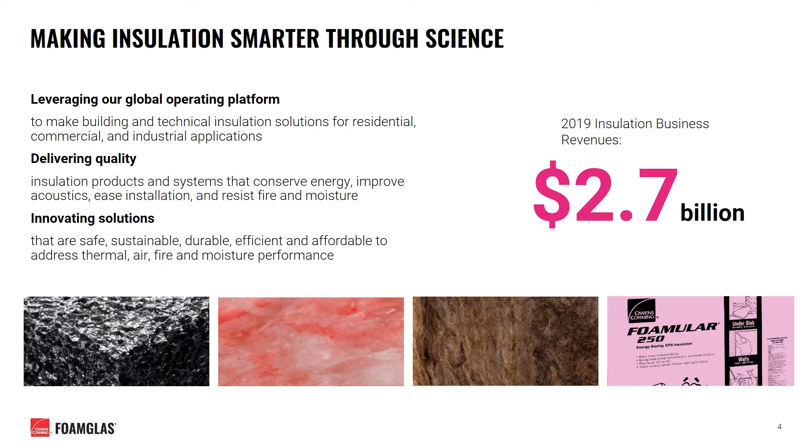Our product portfolio includes open and closed cell insulation solutions, including FOAMGLAS Cellular Glass, fiberglass, Paroc and Thermofiber mineral wool, and FOAMULAR extruded polystyrene. Being a global insulation business, we have over 7,400 employees across 20 different countries, and we also have 43 different manufacturing locations that allow us to service jobs across many different markets.

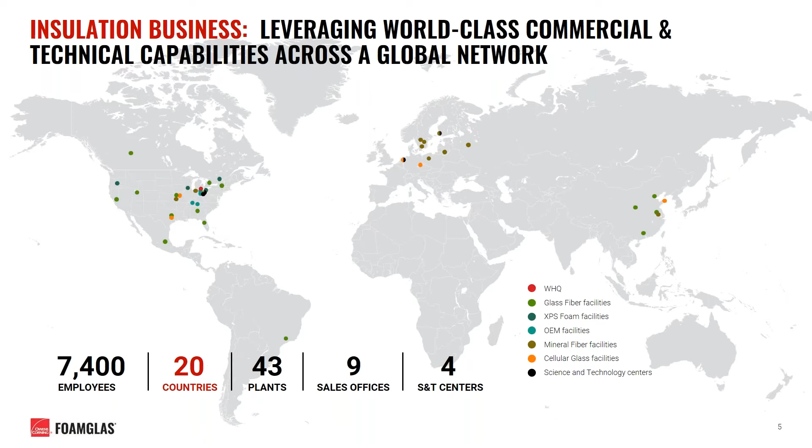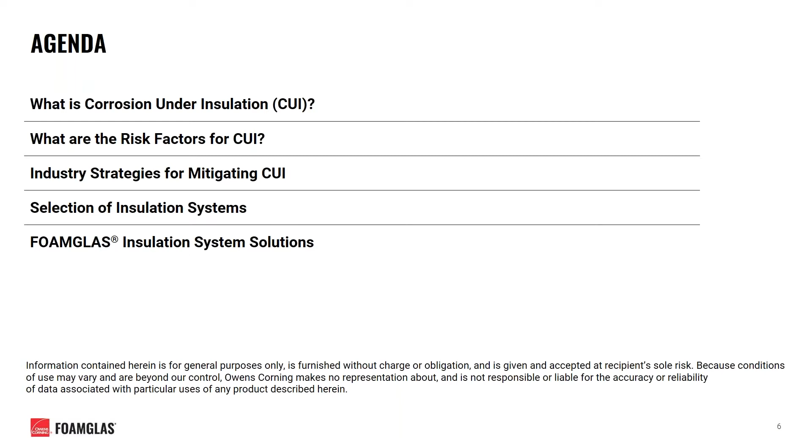I'd like to start with a question for the audience: what is corrosion under insulation? Let's dive into this topic. First, I'll define what corrosion is. NACE, the National Association of Corrosion Engineers, defines corrosion as a naturally occurring phenomenon commonly defined as the deterioration of a material, usually a metal, that results from a chemical or electrochemical reaction with its environment. I know it's a mouthful. Simply put, it's the degradation of a material into a more chemically stable version of itself given its environment.

In a 2016 report, NACE estimated the global cost of corrosion to amount to $2.5 trillion, which for comparison equated to roughly 3.4% of the global GDP at the time of the study. So you can get an idea of how large a problem corrosion is on a global basis.

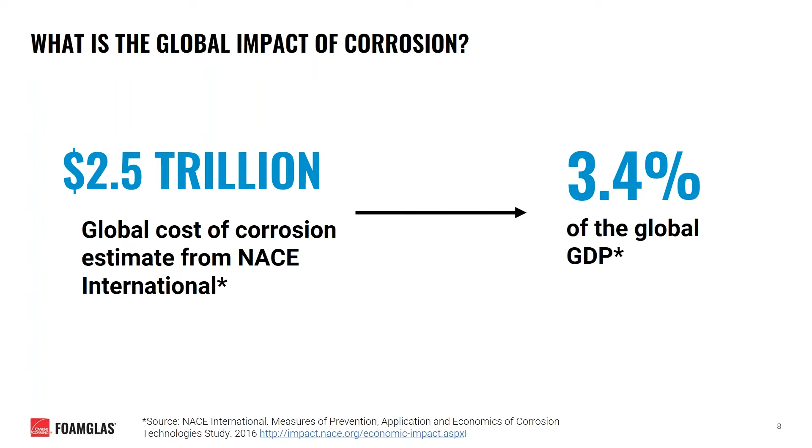NACE defines corrosion under insulation, or CUI, as a severe form of localized external corrosion that most commonly occurs on insulated carbon and low alloy steel and stainless steel equipment. Carbon steel and stainless steel corrode via different mechanisms, but in today's presentation we'll primarily focus on the corrosion of carbon steel pipes.

Here's a brief list of potential consequences of corrosion under insulation. It can lead to unanticipated failure of the process system, damage to expensive equipment, costly repairs and/or downtime. If it gets serious enough, or if it's on a significant process, it could be a safety hazard, leading to failures that result in fires or explosions, or worst case, injury or death—something to avoid and keep in mind when mitigating CUI.

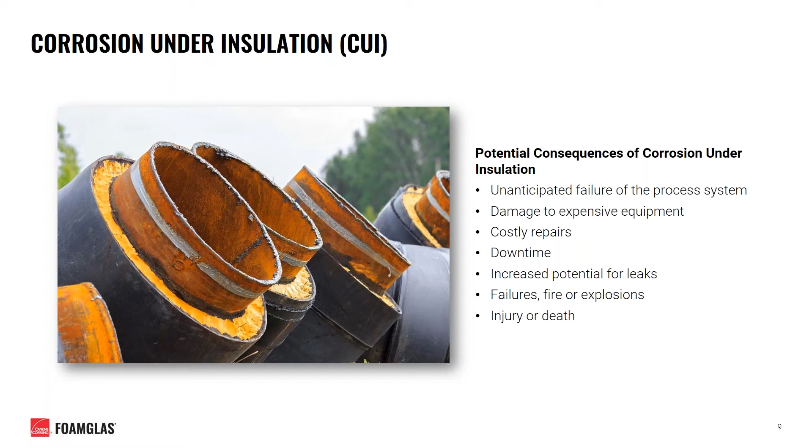There are three primary risk factors that contribute to the increased risk of corrosion under insulation: the presence of moisture, the chemical content within that moisture, and the presence of heat. We'll now try to understand the role each of these factors plays in corrosion.

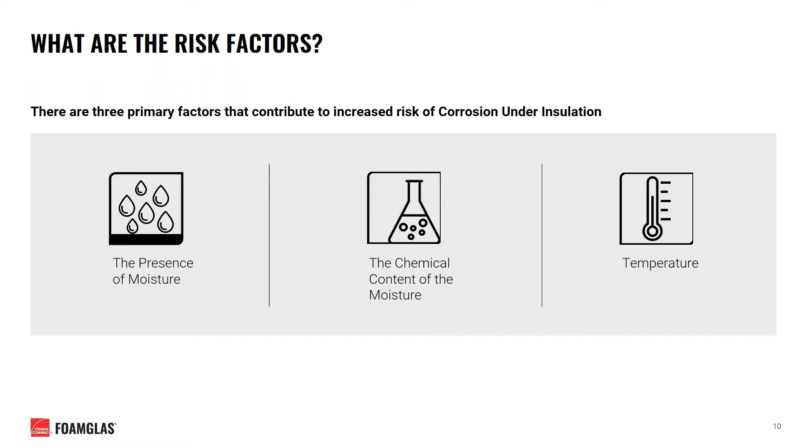Starting with moisture, the first factor we listed. It's often well understood that wet insulation can lead to various process and efficiency losses within a system, but the presence of liquid moisture or water is also a basic requirement for corrosion to occur. There are numerous potential sources for water to get into an insulation system, such as condensation, normal precipitation, process leaks, or even mechanical intrusion from sprinklers or cleaning processes.

I'd like to hit home on those last couple sources. Sometimes it's overlooked, but if you're working on a facility where part of the planned maintenance for a given system is the occasional hose-down of the equipment, keep that in mind, as it presents a big risk for water to penetrate the system at some point during the life of the process.

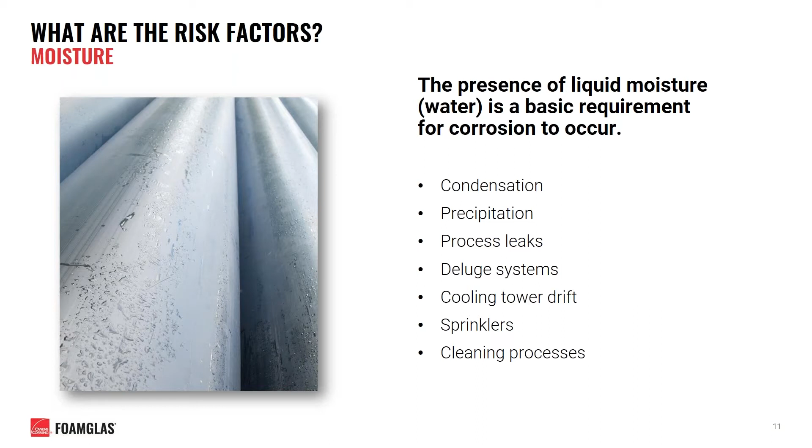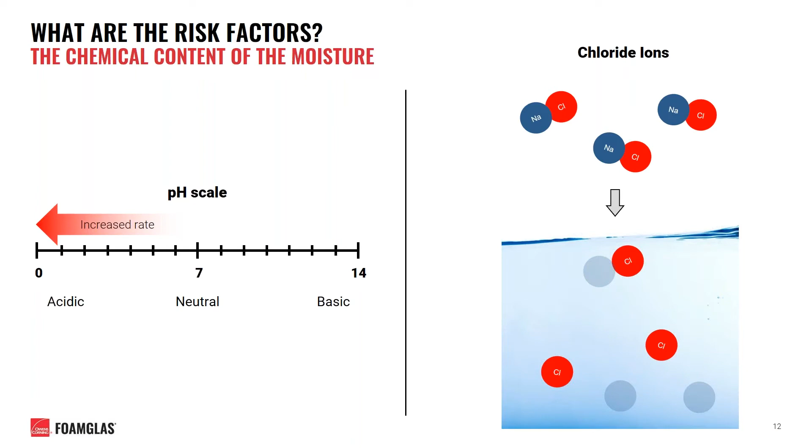Additionally, looking on the right, the presence of chloride ions or other contaminants that increase the electrical conductivity of water can also accelerate corrosion. Chloride ions can be introduced into a solution when molecules like sodium chloride, or salt, are allowed to dissolve in water. This can result from pollution from the external environment or by leaching from components of the insulation system that the water comes into contact with.

Another factor that contributes to accelerated corrosion is the presence of heat. As long as liquid moisture is available, the corrosion rate will increase with temperature. That means the primary surface temperatures at risk of corrosion are roughly 25 to 350 degrees Fahrenheit, where it's feasible for liquid water to penetrate a system and still contact the steel pipe. On the cold end, corrosion may still take place, though at a slower rate than at higher temperatures, whereas on the hot end, corrosion occurs much more rapidly.

However, as you approach temperatures above roughly 350 degrees Fahrenheit, it becomes less and less likely that liquid moisture will be in contact with the pipe, as it may boil off as vapor before coming to rest against it.

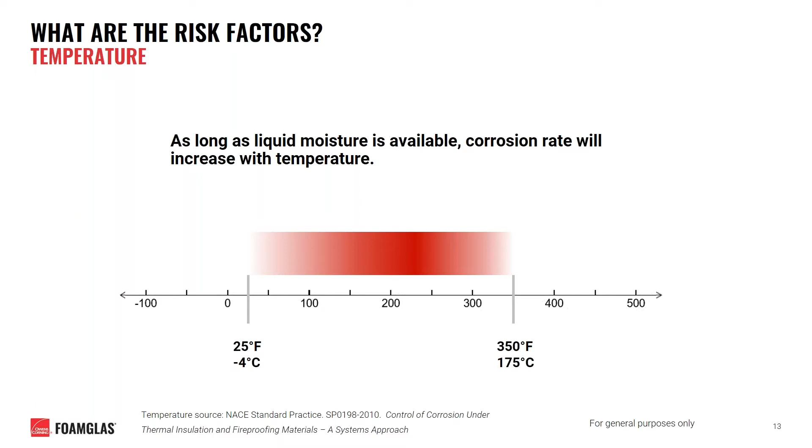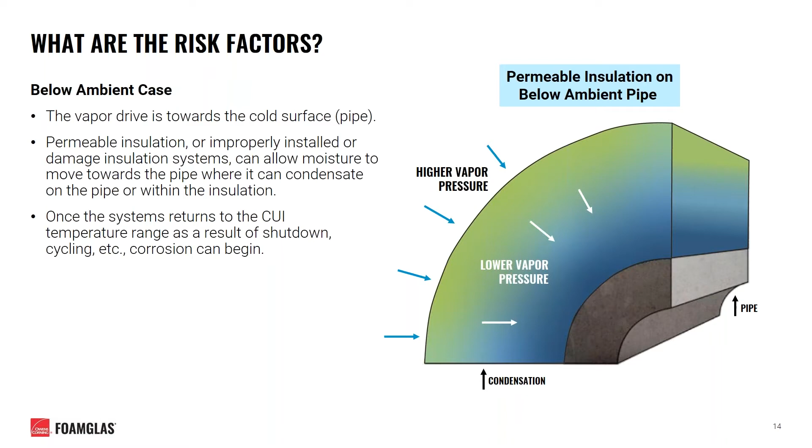For pipes that operate below ambient temperatures, there is a constant vapor drive from the warmer environment to the cold pipe surface. For permeable insulations or insulations that are not properly installed, this vapor can quickly move into the system, where it then condensates on the pipe or within the insulation itself. On especially cold systems, this condensation may turn into ice, which, not being liquid, does not inherently contribute to corrosion. However, if the system is allowed to warm up due to shutdown or cycling processes, that ice can melt and introduce a large amount of liquid water onto the steel pipe, quickly becoming an environment for corrosion to take place.

Similarly, we can look at what happens to permeable or poorly installed insulations on hot pipes that operate above 350 degrees Fahrenheit or so. If moisture penetrates the system, liquid water near the surface of the hot pipe will boil off as vapor. This can force any liquid water present away from the pipe, where it often settles within the insulation at some thickness. Here, the liquid can become acidic or concentrated with chloride ions over time as it leaches from components of the insulation. Then, if the system is allowed to cool off during a shutdown, this now chemically harsh solution can freely move to the surface of the pipe, where it settles and can cause rapid corrosion to take place.

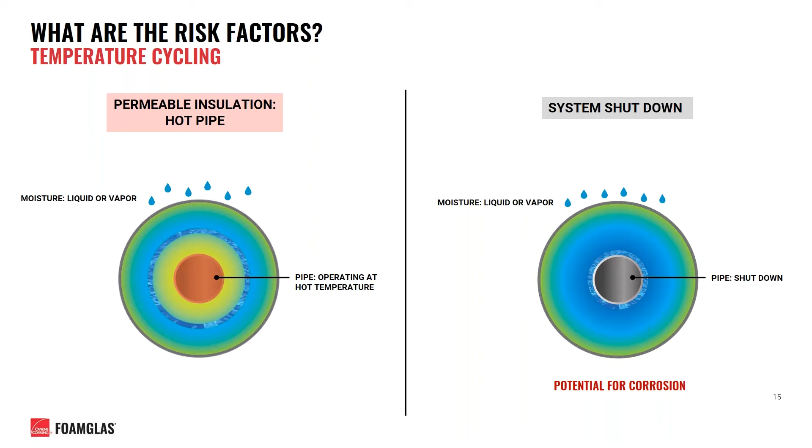Now we're going to talk a little bit about what strategies are commonly used already to combat these risk factors we've just discussed.

One of the most common methods of mitigating CUI is the use of a vapor retarder to prevent moisture from penetrating an insulation system. These are seen all over the place. They can be effective when used over rigid insulation materials. However, they are susceptible to physical damage and can fail entirely if not properly installed.

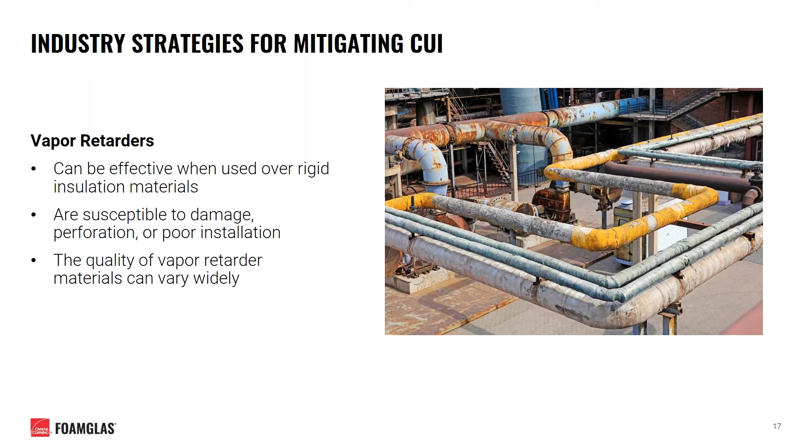Paints, mastics, gels, or other coatings can also be used as a physical barrier between the pipe and the insulation itself. Foils are also sometimes used as a physical barrier and for cathodic protection, where they're installed directly over the pipe and underneath the insulation.

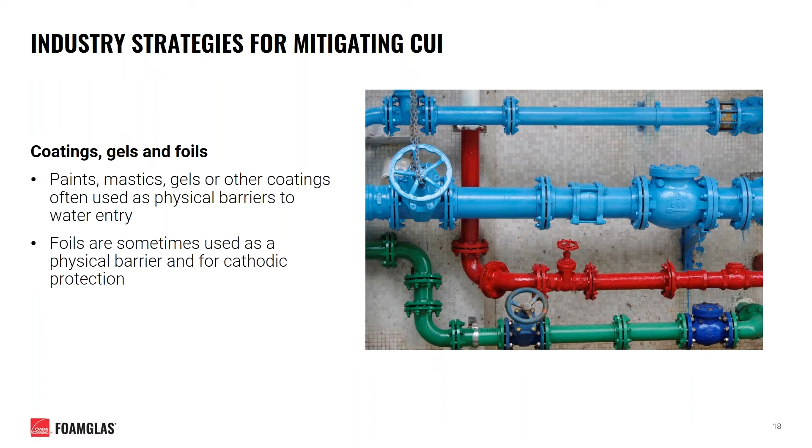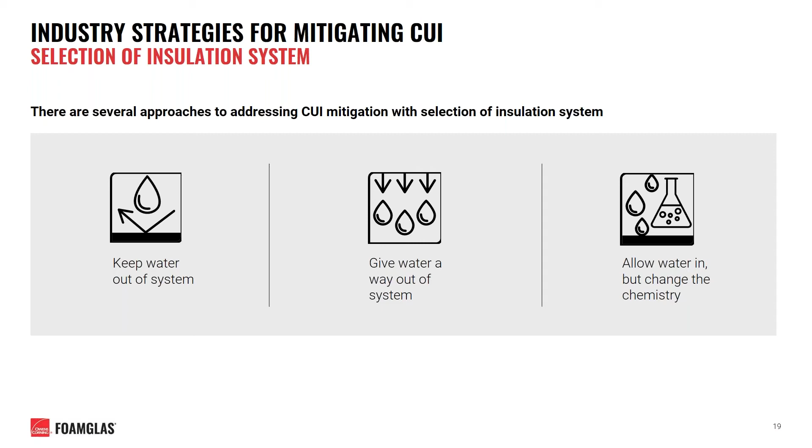In general, most approaches to mitigating CUI will come down to one of three methodologies: A, keep water out of the system; B, give water a way out of the system; or C, allow water in but change its chemistry as you do so.

Now we're going to discuss some things to keep in mind when considering what you would want to use as your insulation system when mitigating CUI.

While today we will be focusing on the insulation system, I'd like to take a minute to point out that insulation materials alone are not a solution for CUI, but rather they should be used as a component of an overall strategy that takes multiple areas into consideration.

When designing a system, one will want to give thought to what pipe materials would be best for your process, what your insulation components should consist of, what claddings, coatings, or other tertiary materials you should use alongside them, and what your inspection and maintenance plan will consist of. Designing with all of these criteria in mind is crucial for developing an effective and long-lasting system.

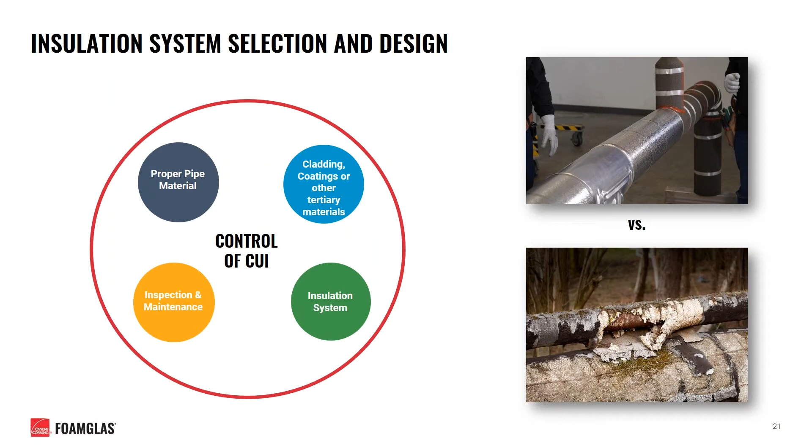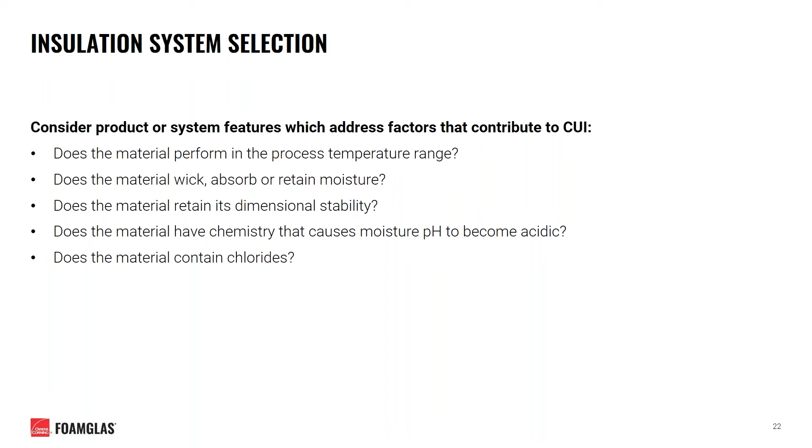Now, when selecting an insulation system for the mitigation of CUI, there are multiple questions one should ask themselves. Does the material perform in the process temperature range? Does the material wick, absorb, or retain moisture? Does the material retain its dimensional stability? Does the material have chemistry that causes moisture pH to become acidic? And does the material contain chlorides that could leach into water if it comes into contact with it?

So when considering these issues we just established, there are many characteristics of cellular glass insulation that can help mitigate CUI. Starting off, cellular glass insulation is the only insulation material that's truly impermeable. Being composed of glass walls, it will not wick, absorb, or retain moisture. It's also dimensionally stable, having a coefficient of thermal expansion similar to that of steel. It's chemically inert and does not promote the corrosion of carbon steel or stress corrosion of stainless steel. It contains a low amount of leachable chloride ions and has been tested for compliance to ASTM C795, specifically for use on austenitic stainless steel.

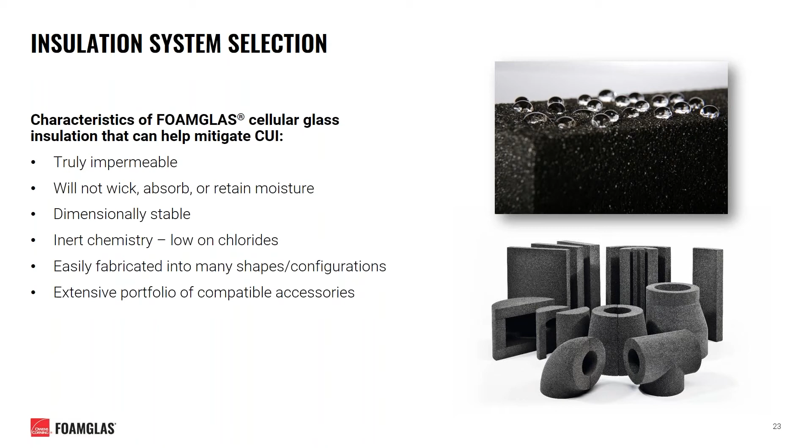Foam glass is easily fabricated into a multitude of shapes and configurations, and we currently offer an extensive portfolio of compatible accessories specifically engineered to form complete insulation systems.

From here, we're going to introduce two new systems from FOAMGLAS, specifically tailored for CUI mitigation. They are our FOAMGLAS Sealed System with our proprietary joint sealant technology, and our FOAMGLAS Spacer System with proprietary spacer technology.

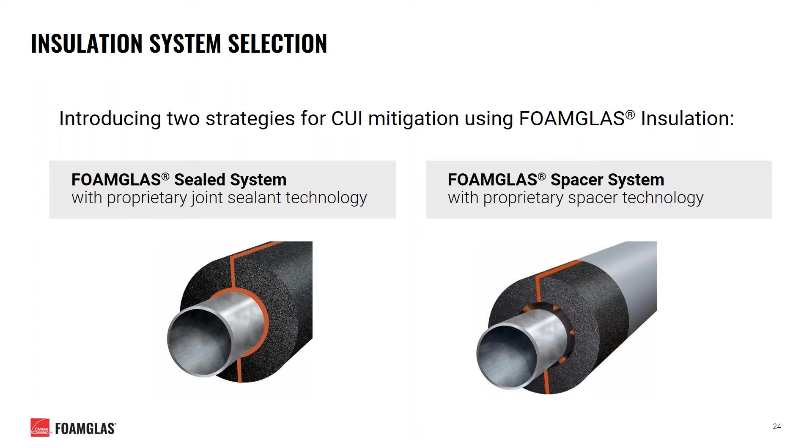So we'll start off talking about our FOAMGLAS Sealed System, which, as discussed earlier, follows the methodology of keeping water out of a system.

The FOAMGLAS Sealed System utilizes the natural impermeability of cellular glass insulation to its advantage. It's applied in a way to seal all joints and compartmentalize insulation system components from each other. Some additional benefits are that it requires no additional additives, and it uses traditional sealed cold system techniques that many installers are already familiar with today.

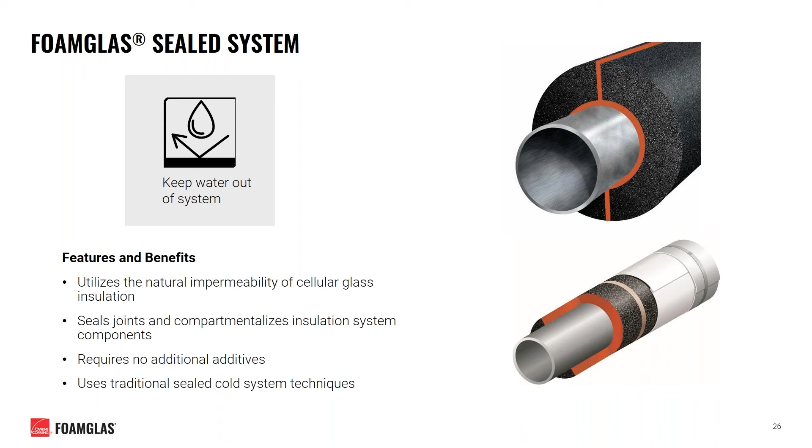A key component to the FOAMGLAS Sealed System is our proprietary PITTSEAL HI-TEMP LV RTV sealant. This sealant is specially formulated to be low viscosity, which enables it to efficiently spread and seal all joints within the system. It neutral cures to an elastomeric solid at room temperature, does not contribute to corrosion, and boasts a wide service temperature range from -238 to positive 450 degrees Fahrenheit.

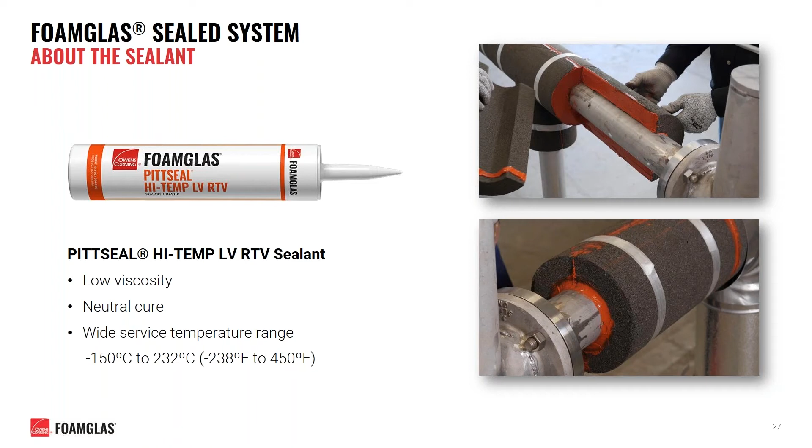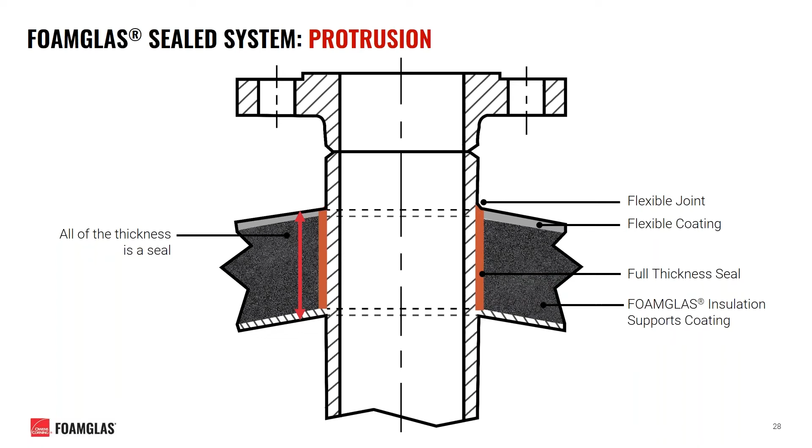Here you can see some photos of the sealant being applied to a protrusion in this manner. Notice how enough sealant is applied to ensure that it spreads evenly across the entire mating surfaces of the insulation when the two pieces are pressed together.

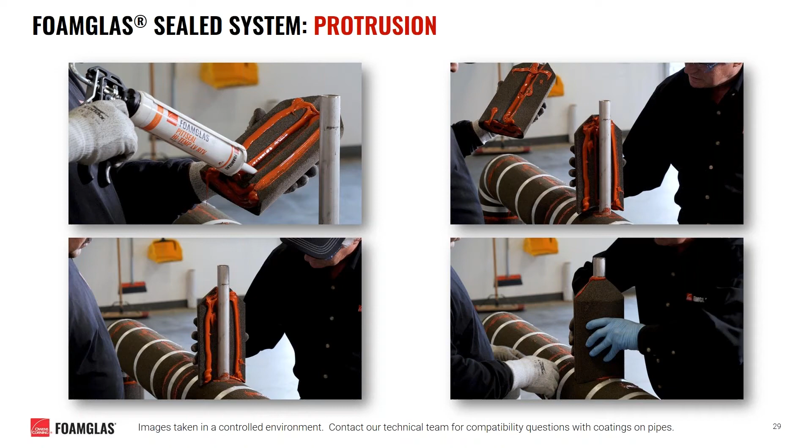So where would you want to specify this new FOAMGLAS sealed system? Well, we recommend using this where CUI is a concern and on below ambient piping with a high vapor drive towards the cold pipe, on underground or direct buried applications, on above ambient applications or applications that are cyclical in nature, or areas where other conditions are present that require the use of a sealed system. Note that it is not intended where continuous immersion is expected.

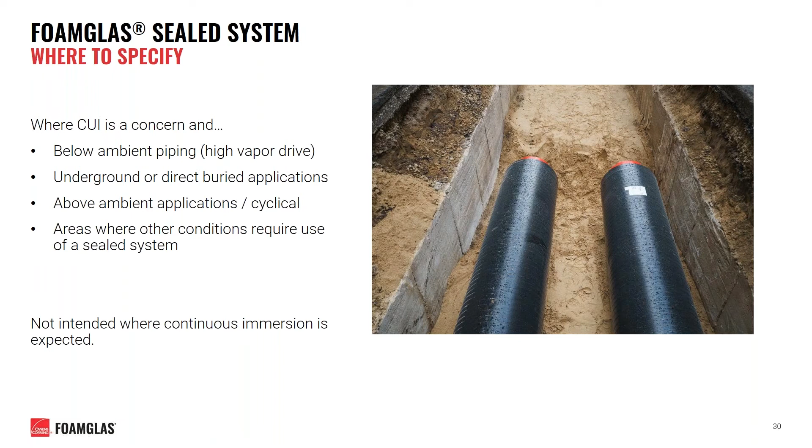We at Owens Corning offer a wide array of documentation and support for the sealed system, ranging anywhere from application guide specifications to product data sheets, safe use instruction sheets, detailed drawings, and technical support. We can handle any technical questions you may have that come in. We have application test reports, and we even have application training opportunities to help instruct your team how to properly install it in the field.

During development, we also conducted multiple different tests to document the performance of this system. One of these was a modified ASTM test that tested the system within 2 different controlled environments over 28 days. One chamber was simulated with a salt solution of rain, while the other was simulated with a salt solution of rain and fog. In our experience of running these tests, they are considerably harsh to unprotected metal pipes and often exhibit very obvious signs of corrosion upon conclusion.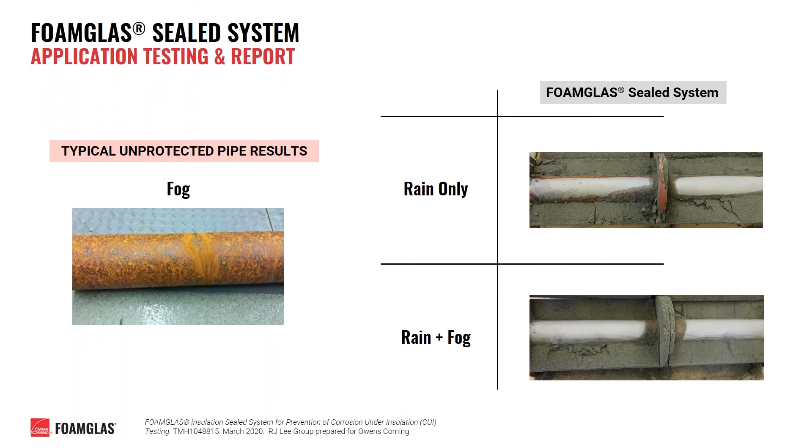So now we will move on to discuss our other system, which is our FOAMGLAS Spacer System, which follows the approach of giving water a way out of the system.

Our FOAMGLAS Spacer System is a prefabricated solution consisting of traditional foam glass insulation suspended around the pipe with specially designed spacers. The air gap that's generated allows for liquid moisture within the system to collect away from the surface of the pipe. Small drain holes are then cut into the bottom of the insulation to allow for the water to leave the system via gravity.

Additional accessories are used to compartmentalize the system, creating multiple predetermined sections that each allow for drainage to occur. The air gap that's generated from the system is actually ideal for supporting heat tracing configurations, and it's even been tested to meet Class A and B acoustic requirements of ISO 15665.

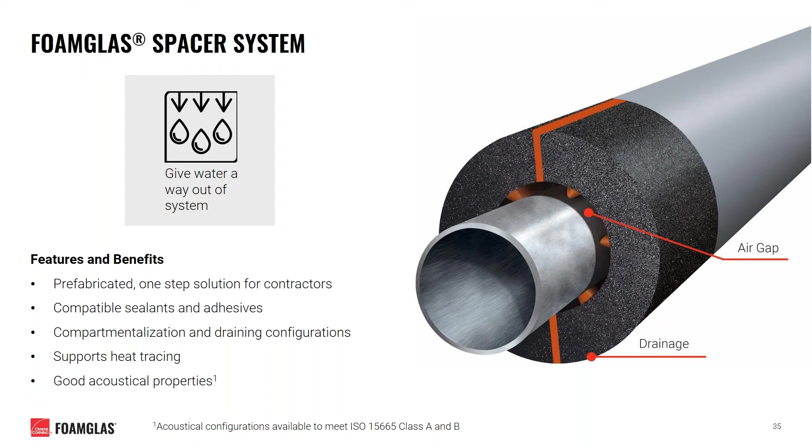Moving on to some of the accessories of this system, the system utilizes proprietary silicone spacers and termination strips, as you can see on the bottom right, to effectively space the foam glass off of the pipe surface. These components are adhered to the insulation itself using our PC high temp RTV adhesive.

We then utilize the same PITTSEAL high temp LV RTV sealant found in the sealed system to seal the joints between insulation sections. The termination strips and impermeable cellular glass insulation allow the system to be compartmentalized every few feet, where drain holes are then introduced to allow any water present to quickly leave the system.

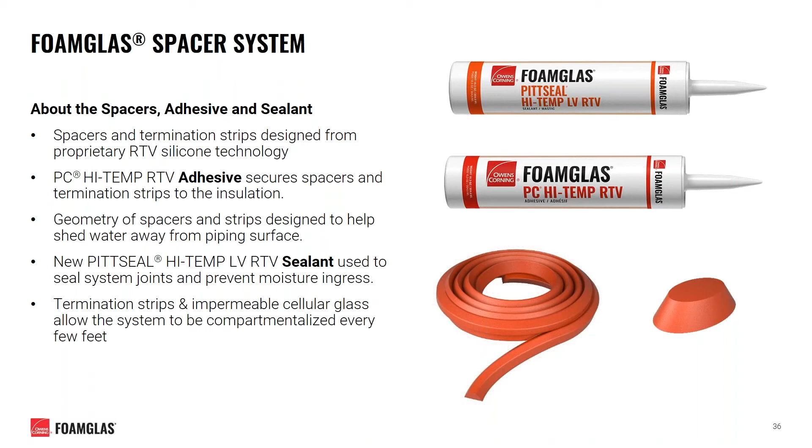So where would you want to specify this new spacer system? Well, we recommend it where CUI is a concern and where water intrusion is probable from secondary sources, where you're using it on above ambient and hot systems with continuous or near continuous operation, on systems where acoustical consideration is needed, often used on offshore marine applications.

As we mentioned earlier, it's very good at supporting heat tracing configurations given the air gap that's present. Note that it's not intended for below ambient or hot-cold cyclical systems, direct buried systems, or systems where continuous immersion is expected.

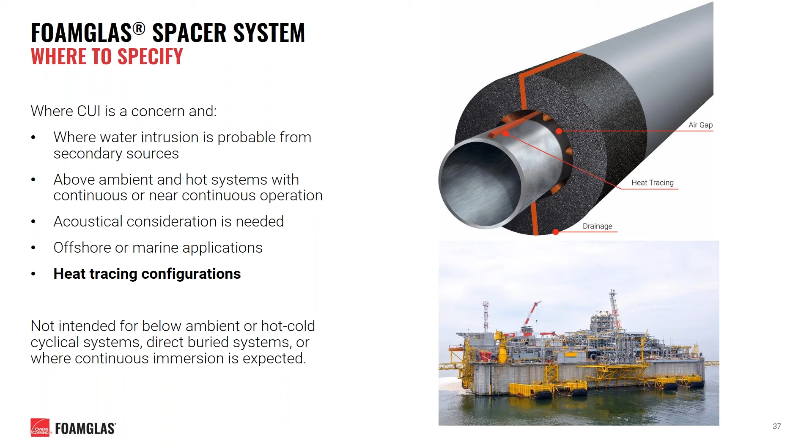Here you can see a list of current reference projects where the system has been used. As you can see just by taking a quick look here, it is often favored for offshore and marine type applications.

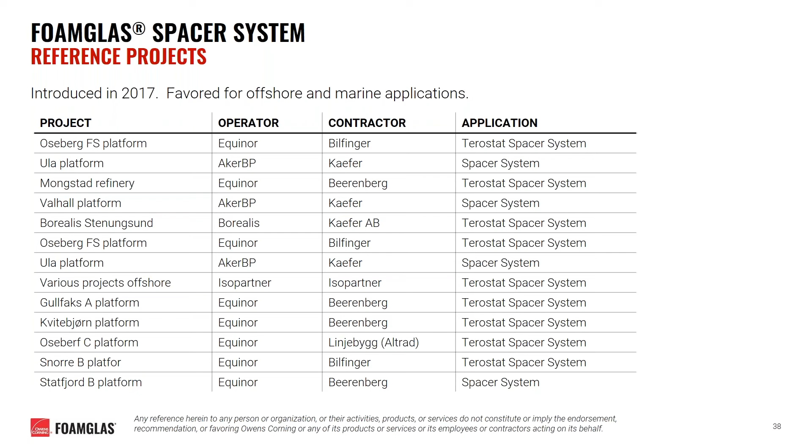Just like the sealed system, FOAMGLAS offers a multitude of documents and support for this spacer system. We have application guide specs around fabrication, product data sheets, safe use instruction sheets, detailed drawings, field references, and once again, application training opportunities to ensure that your team knows how to properly install it.

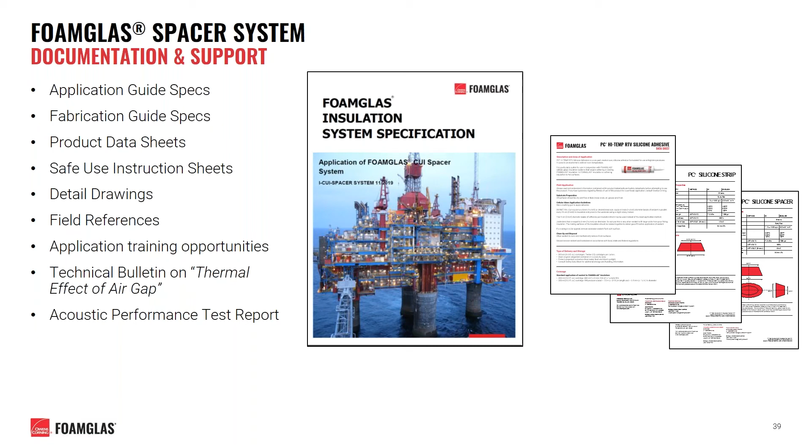We have a technical bulletin on the thermal effect of the air gap that's introduced into this system, as well as acoustic test reports on the acoustic performance to ISO 15665 that we mentioned earlier.

One thing I'd like to reinforce right now is that we have a whole dedicated guide specification specifically around the proper fabrication of this spacer system for being sent into the field. This guide specification will allow this system to be fabricated to consistent and correct dimensions for various pipe sizes so that segments can show up to the job site properly sized and ready for installation.

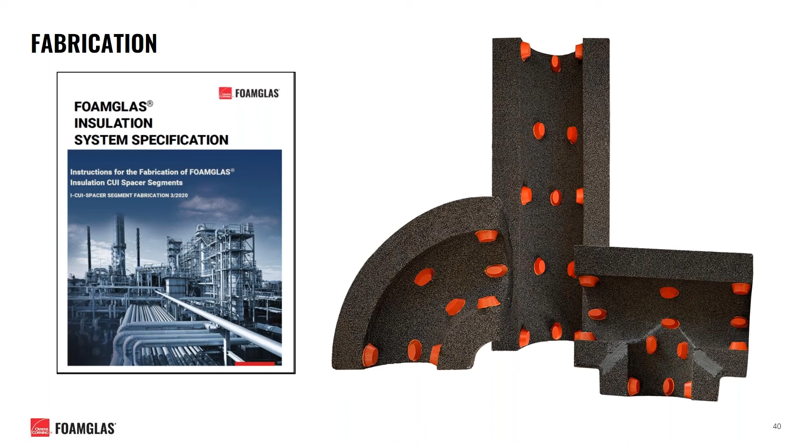So in summary, CUI can have very severe consequences on your system. You want to understand the risk factors for your specific process when trying to mitigate CUI. CUI can be controlled with a comprehensive strategy, which includes the proper selection of insulation systems. Our new FOAMGLAS Sealed System and FOAMGLAS Spacer Systems may be included as part of this strategy for mitigation of CUI.

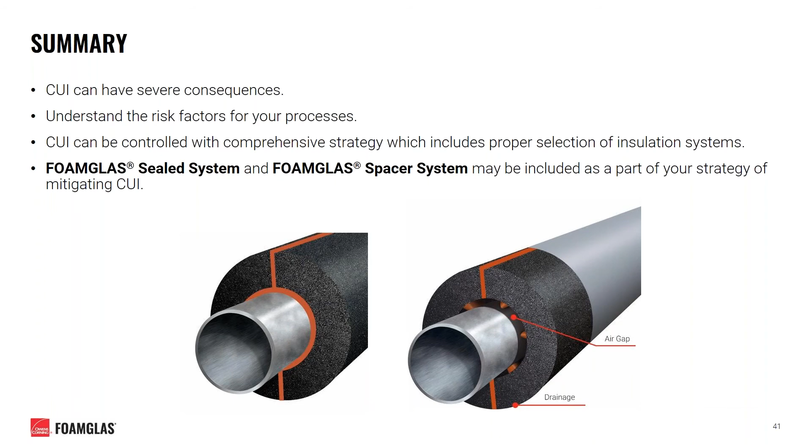As a final point of emphasis, proper installation is imperative for any of the systems we've mentioned today. One should always ensure that application guide specifications are being followed, proper materials are being used, and all installers are properly trained. Our technical team at FOAMGLAS frequently hosts in-person training sessions at our facility in Fresno, Texas. Please reach out to us if you have any interest at all in scheduling one for yourself. We'd be happy to work with you.